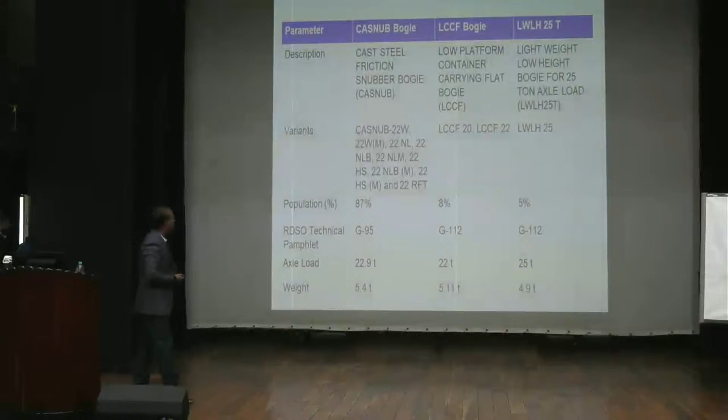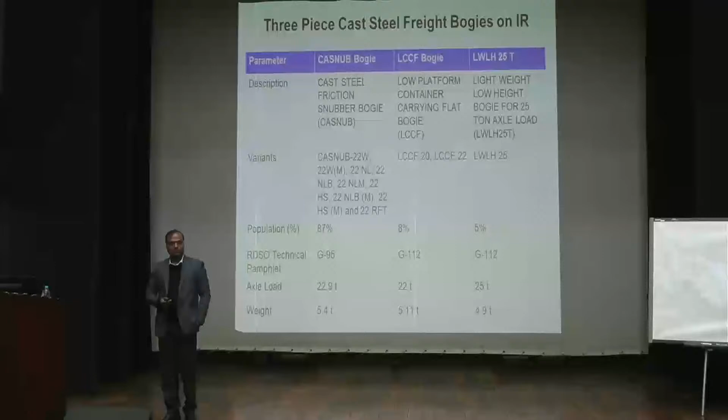Before I start, I will briefly inform you that in this presentation, I have tried to use the knowledge and the experience that we have incurred in the last two to three years with the failures that we have been asked to associate with. In this association, what we observed was that there was a feeling from our RDSO side that some knowledge was missing, not only in terms of technical guidelines, but also in making the existing guidelines understood at the field level.

In some of the cases, we observed intermixing of different bogies in a wagon, like NLB and HS bogie were mixed together. There were cases of improper maintenance of center pivot, improper maintenance of side bearer. So, not only the maintenance aspect, there was also a lack of understanding. So I tried to capture those things in my presentation.

So let's start with a brief history about the freight bogie. We can categorize the freight bogie into three categories. One is the Casnub bogie, which is one of the earliest bogies introduced on the Indian Railway system. Later on, we developed the LCCF bogie for container wagons. And the latest development is the LWLH 25-ton bogie. Each bogie has its different rules, and I will briefly touch upon that.

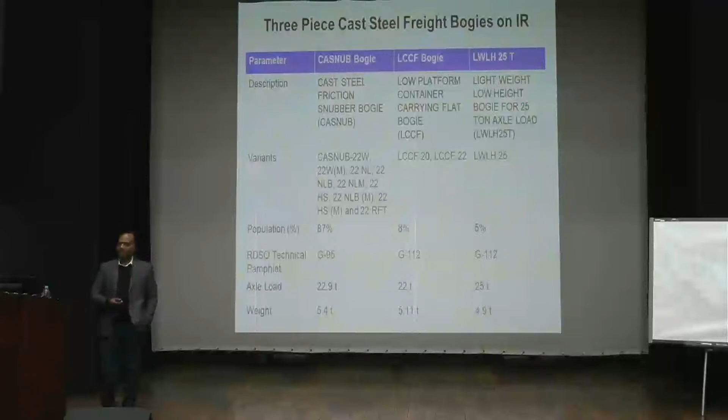CASNUB bogie was introduced, as rightly Director Sir said, in the 1980s and 70s in fact, and the earliest bogie was the W bogie, that is wide jaw bogie, and it was having wide jaw, integrated center pivot, and sliding type brake. And it was a very heavy bogie, weighing more than 5.5 tons. Each bogie weight was very heavy.

Later on, it was improved to WM bogie based on the experience. And in fact, this earliest bogie was not having any provision for elastomeric pad. So at that time there were cases of wheel wear and dynamic issues. So the concept of elastomeric pad, that is primary suspension, was introduced in WM bogie with hanging type brake beam.

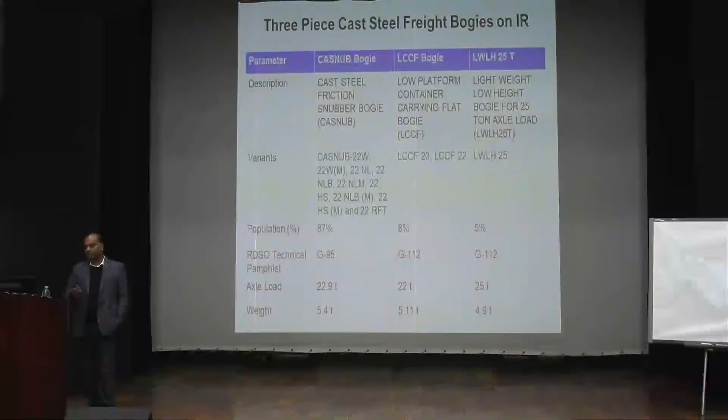Later on, a study of optimizing the bogie weight was taken by RDSO, and that led to development of the NL bogie. Now, as the name suggests, that is the narrow jaw with light weight. And again, further, the chemistry of this bogie was improved, and with the collaboration with the stakeholders, two new bogies further evolved. One bogie was called NLB, based on the same bogie; the NL bogie was converted to NLB, and that was the bogie using the chemistry of M/s Besco foundries.

And another bogie that was evolved from NL bogie was NLM, the Mukund bogie, that was using the chemistry of Mukund firm. But later on, Besco agreed to share their chemistry with Indian Railways, and we have taken forward this NLB bogie. However, NLM couldn't proliferate further because of the constraint that Mukund didn't agree to share their chemistry.

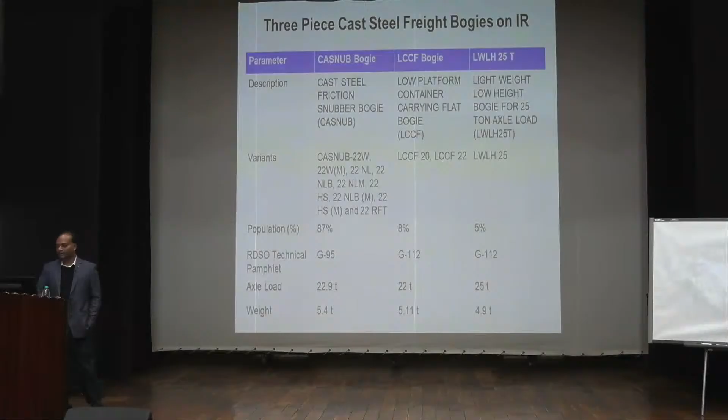Now, as you can understand, W, WM, NL, NLM, all these bogies are obsolete these days. The latest or the recent bogie is HS bogie, and here you can see some new terms HSM, NLBM, and RFT. So I will talk about these new bogies in my presentation. And just briefly I'd like to tell you that we have a technical maintenance pamphlet for CASNUB. As you know, G95 is the technical bulletin that can be followed, whereas for LCCF and LWLH, G112 technical bulletin can be followed.

As in CASNUB bogie, earlier we were using roller bearing. Later on it was upgraded to CTRB. However, in LCCF and LWLH, CTRB is being used since inception, whereas in LCCF E-class CTRB is used, and in LWLH K-class CTRB is used.

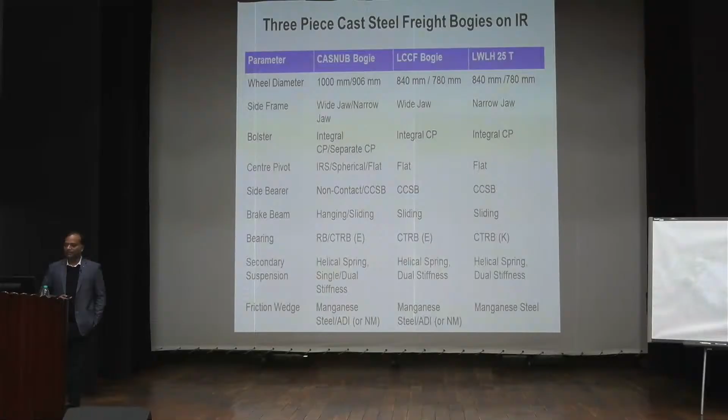Now, with respect to secondary suspension, in CASNUB bogie we are using helical spring with single type stiffness, that is for NLB, and dual stiffness for HS bogie. This is a major difference that I will also talk about in my next slides. Whereas LCCF and LWLH bogies are using dual suspension. That is, it has one suspension in empty condition and another suspension in gross condition.

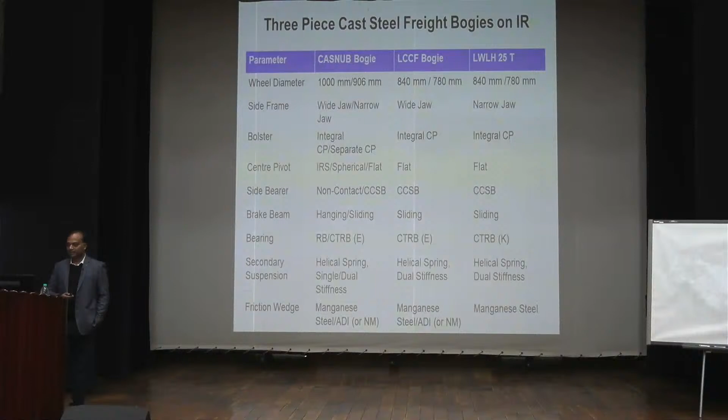The friction wedge is one of the major differences in all those bogies. In case of CASNUB bogie, we are using manganese steel in some of the bogies and ADI or non-metallic wedge in other bogies. However, in LCCF bogie, the original design, which was designed for 20 ton BLC and BLC A and B, these bogies were built with manganese steel friction wedge. Later on, when this bogie was upgraded to 22 ton, 100 kmph speed, this bogie was built with the ADI or non-metallic wedge. However, in LWLH bogie, we are using manganese steel.

Now, I'll briefly talk about these new bogies, what we have developed and which bogies are now in operation. As Director Sir has rightly mentioned, there are certain areas that RDSO or Indian Railways should work upon, and that is the axle load and the speed. And this is what we are actually working on for the last 4-5 years.

Just to mention, the global standard is that freight wagons are operational at a maximum speed of 100 or 120 km. No country is using any freight cars above 120 km. That is the maximum. So with respect to speed, we are more or less closer to the world standard. However, yes, we lag in the axle load. Now there is a concept of heavy haul operations, which means axle load above 25 tons. Ours maximum is 25 tons. So that is the area which definitely requires some study, some work, which can lead to improvement in axle load.

So as a part of Mission Raftar, as all of you may be aware, Indian Railways in 2018-19 has taken an initiative to increase the speed potential of all its freight stock to one speed, that is 100 kmph.

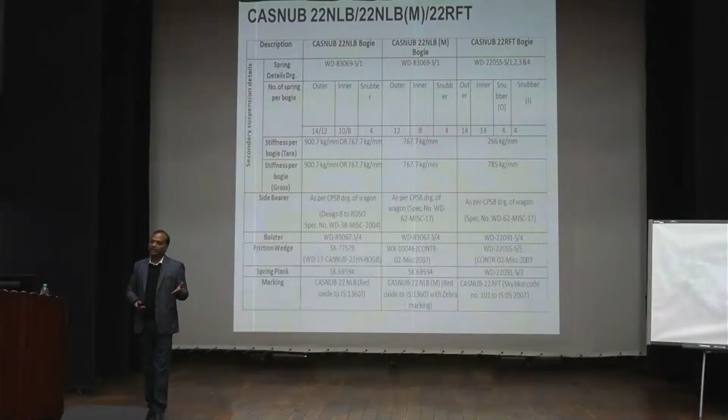So we took the initiative to modify the suspensions so as to increase the speed potential of the wagons which are not fit for 100 kmph. As part of that exercise, we were successful in upgrading the speed potential of around another 30% of wagons by suitable modification in the existing suspension. That resulted in the development of NLBM for those wagons fitted with NLB, whereas for wagons fitted with HS bogie and not fit for 100 kmph, this modification resulted in the development of the HSM bogie. I'll briefly tell what the difference is.

With respect to NLB and NLBM bogie, the bogies in totality are the same. The only difference is in the secondary suspension. It is in the number of springs: the number of outer and inner springs of NLB and NLBM were reduced. The existing NLB bogies are fitted with 14 outer springs, or in some wagons 12, whereas inner is either 10 or 8. When upgraded to NLBM, we brought the number to 12 outer springs and 8 inner springs.

Secondly, what modifications were done? The second modification was with respect to the side bearer. NLB bogies are traditionally fitted with PU type side bearer, design B. To improve the curving performance, we have used spring-loaded side bearers governed by the RDSO latest specification WD62. The third modification pertains to the friction wedge. Why was this important? To improve the damping of the bogie. The existing NLB bogies were fitted with manganese steel friction wedges, while NLBM bogies were fitted with either ADI or non-metallic friction wedges.

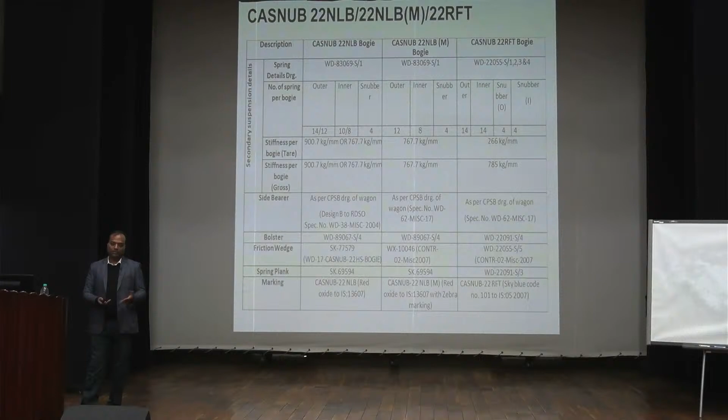What is this ADI or non-metallic friction wedge? It is basically the same wedge as the manganese steel one, but with a higher coefficient of friction. So this increases the damping of the bogie, the side bearer helps improve the curving performance of the wagon, and the reduction in springs helps improve the riding of the wagon. These three modifications help the wagon run at 100 kmph in both empty and loaded condition.

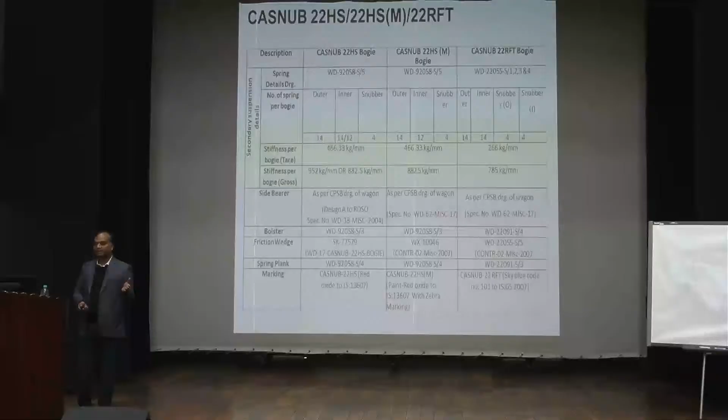Similarly, for wagons fitted with the HS bogie, we did a similar modification where the secondary suspension springs were reduced. The outer springs were kept the same, while inner springs were reduced from 14 to 12. The side bearer was changed from design A PU side bearer to long travel side bearer as per RDSO specification WD62, and the friction wedge from manganese steel to non-metallic or ADI. These three modifications helped the HS bogie wagons also improve their speed potential to 100 kmph.

However, in certain cases, even with this modification we couldn't improve the speed potential of the wagon to 100 kmph. For example, BCN type wagons, tank type wagons, or BCN HSM1 hopper type wagons, which were longer in length, wider, and higher. Their dynamic requirement is quite different, and with this minor modification we could not improve their speed potential. So that required a major change in their suspension system.

For this, we had to redesign the complete suspension system. That includes redesigning the springs, that is the outer spring, inner spring, snubber outer, snubber inner. These are completely different springs, not similar to those of the HS bogie or NLB bogie. So that is one change. This bogie was also fitted with a non-metallic friction wedge or ADI wedge. And third is the long travel side bearer. With this modification, we were able to improve the remaining wagons' speed to 100 kmph.

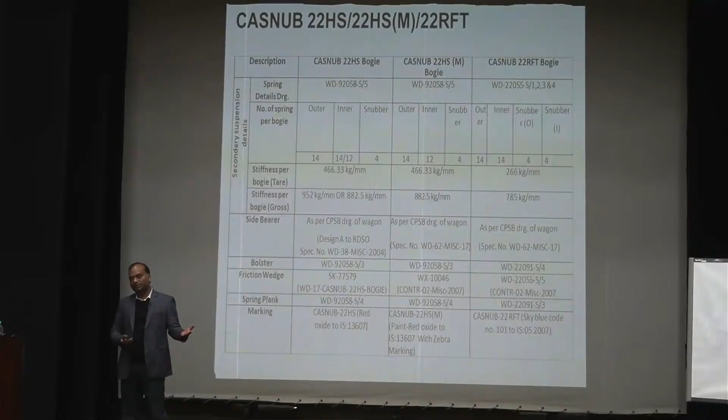And this new bogie that was developed is completely different, because it has a different suspension, a different wedge, a different side bearer, and we call it the RFT bogie. So this is another type of bogie, which basically evolved as a part of Mission Raftar.

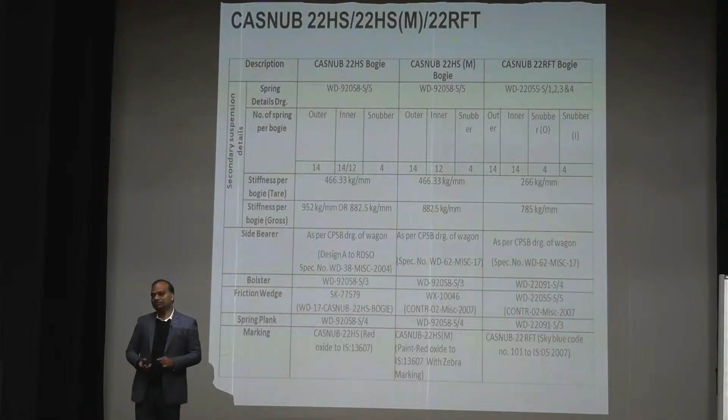One question must be coming to your mind: why do we have so many types of bogies? Most of you must be thinking that. In fact, we keep on increasing the variants. This may result in maintenance issues, confusion, and all those things. This is a very valid question. But why is it so? One reason is that you cannot have a single bogie which fits all types of wagons. Why? Because each wagon has different dynamic requirements.

Smaller wagons have one type of dynamic requirement, whereas a longer, wider wagon has a different dynamic requirement of bogies. And why different types of wagons? Because you have coal, cement, grain. These commodities require different types of wagons, and these different wagons require different types of bogies. You cannot have the same bogie fit all wagons. So this is one reason. However, while designing, we always ensure that with minimum modification we are able to upgrade the speed or maintain the dynamic requirement.

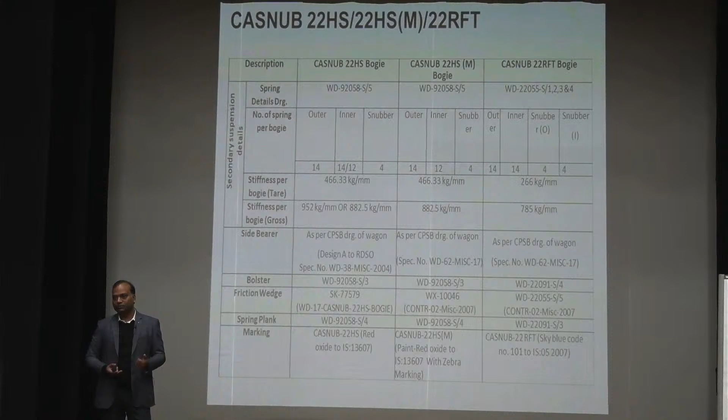And what is the dynamic requirement? That must be coming to your mind. Just to briefly tell you, any wagon or any rolling stock, before being put into service, has to meet certain safety and comfort levels. Once they are met, only then do we issue a speed certificate. That speed certificate is the authority or legal document that says yes, this wagon can be used at that speed.

And how is this speed certificate issued? Based on certain trials, which we call oscillation trials. In the oscillation trial, we run the vehicle at a speed 10% higher than the required speed. For example, if you want this wagon at 100 kmph, it has to run at 110 kmph to check its dynamic parameters. The derailment coefficient should be within the limit, lateral force within the limit, maximum acceleration within the limit, maximum lateral acceleration within the limit. All 4-5 criteria must be met so the wagon can be declared fit for operation.

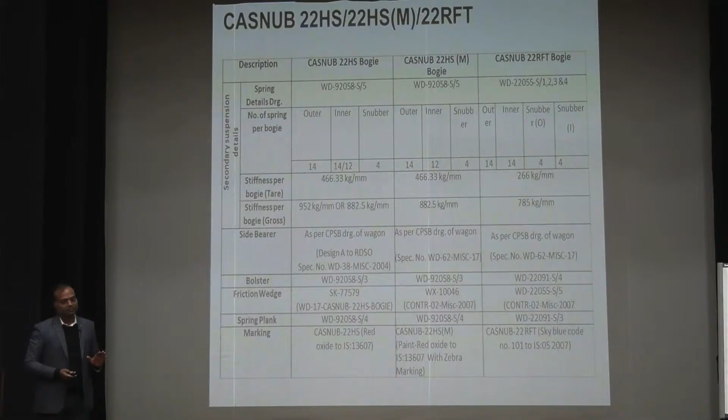So this is just a brief introduction to why different types of bogies and wagons are required, and what these new bogies are. Please understand that the NLB bogie and HS bogie are completely different bogies. Don't intermix them; this is completely prohibited. And now you may also have NLBM, NLB HSM or RFT bogies. So please keep this understanding when you are working at your workshop or depot, that clear-cut marking is given and clear-cut drawings are followed.

I have just introduced you to the wedge and side bearer, the major changes in this bogie. So keep this understanding while you maintain or receive this bogie. If an NLBM bogie is there, what type of side bearer do we have to follow? What type of wedge? What spring group do we have to see? It is given in the drawings. I am just giving you a small introduction.

Now I will come to the improvements we have made in the last 4-5 years, which we would like to share with you. This is an exploded view of a freight bogie, and as you can see, we have an axle, above which we have an adapter, and above which we have an EM pad.

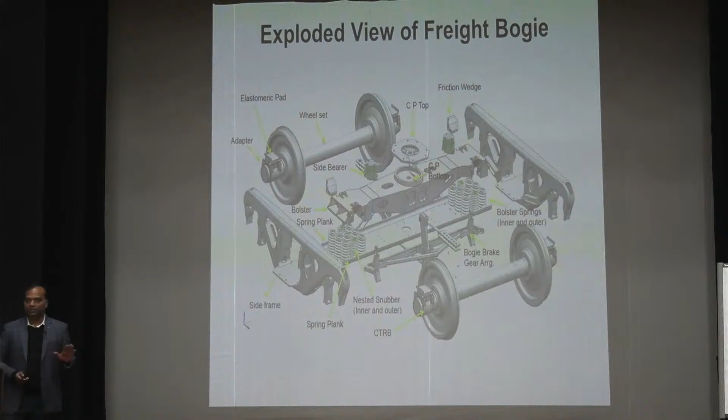I don't require much explanation on this. Okay, so you all are very much familiar with this. I'll directly come to the improvement part. So first, let me start with the jaw or the side frame level. So what improvement we have done in the last 2 years, and what you should know also.

So one thing we have done is that we have tried to reduce the clearance at the jaw level, and this is very important. We have done 3 major changes at the jaw level in the CASNUB bogie, in the LWL bogie, and we are also doing it in the wide jaw LCCF bogie. This will also be issued to all of you very soon. We will be getting an instruction. But for CASNUB and LWLS bogies, it has already been done.

And what are these modifications or changes? Number one, we have first provided lugs towards the elastomeric pad just to restrict the unwanted movement of the elastomeric pad. As you can see here, there are two lugs, and similarly one more lug is on the other side. Okay, so you have to provide these lugs during maintenance by welding a proper metal piece with MIG welding.

And now whatever new bogies are coming, they are having them as cast. So you have to just do the retrofitment, and I think most of you are familiar and have been doing this. Okay, the purpose of this is to restrict the unwanted movement of the elastomeric pad, and also to a larger extent it prevents the tilting of the adapter. Okay, so this is one of the major important things.

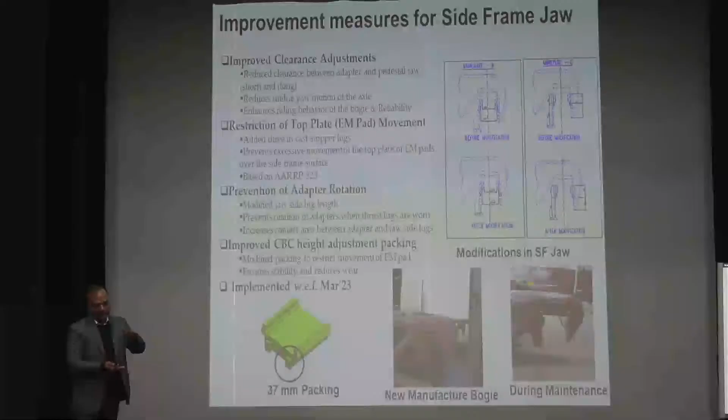Okay, and apart from this, we have increased the projection area of the long jaw. As you can see, this is the long jaw area. So this will basically increase the contact area of the side frame with the adapter. Okay, so you must be having experience of a line sort of wear visible over the adapter. A very narrow strip sort of wear is visible after, let us say, 1 year, 2 years along the adapter. This has happened because a very low contact area is there between the adapter and side frame.

So to avoid such a situation, we have basically increased the thickness. So it increases the thickness and also reduces the clearances. So this will keep the adapter always restricted and avoid any unwanted movements. And the increased projection will ensure that it has a very low wear rate rather than line wear contact.

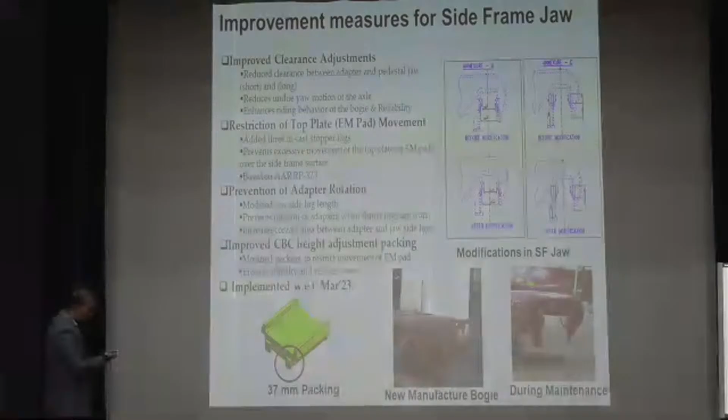Okay. Apart from that, this is the 37 mm packing which is used to maintain the CBC height. Okay, when the wheel dia goes below, I think, 950. Okay, sorry. So this is the packing used. Earlier, it used to have a very big center hole, and it was found that it was making serious projection over the side frame roof, isn't it? So we have reduced that hole and made it plain.

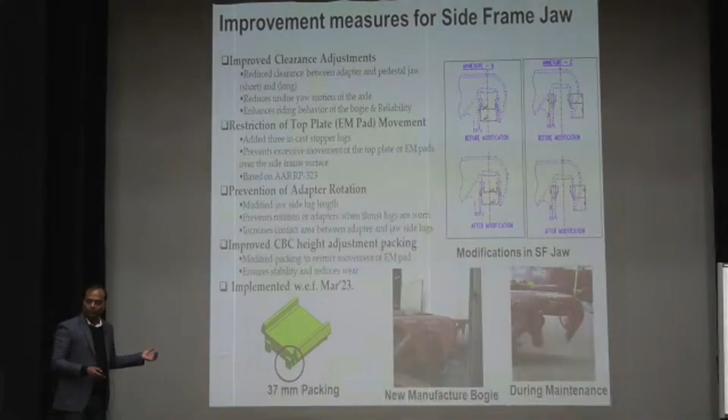Number one, we have provided this sort of lug on this packing. So what will it do? It will tightly fit with the elastomeric pad, and it will be so tight or so integral with the elastomeric pad that it will not allow any sort of movement between the elastomeric pad and the packing.

Otherwise, I have seen personally, in fact, that in most of the cases, this packing is either on the rear side of the jaw or on the trailing side of the jaw, and once it reaches that level, it will maintain that position. It will at all times lead to eccentric loading on the adapter and tilting of the adapter both. So this integral provision will ensure that it maintains the integrity with the adapter and the elastomeric pad. So these are the basic small changes.

Accordingly, all the drawings have been issued, and we are working on G95 also. Very soon you will get a very good document with regard to G95. And in fact, I would request all of you, my team is here, Mr. Pramod and Mr. Vijaypal, they will be contacting you. So you can give them your feedback with regard to G95: what are the changes you want, or what are the problems that you are facing with G95?

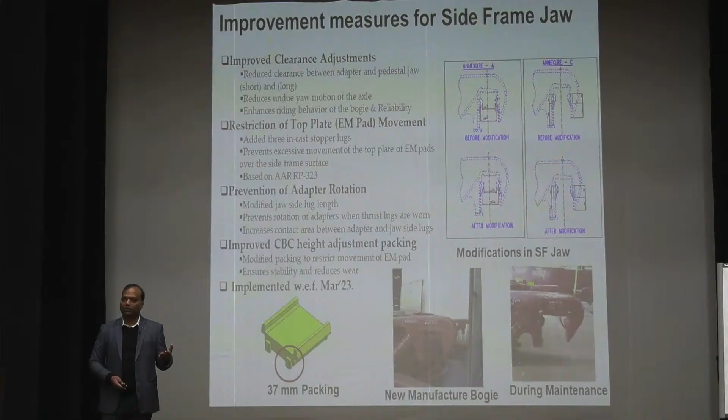Because this is a long exercise we have been doing with the modification in G95, and we are trying to ensure that the document which comes up is more practical, understandable, and eases your maintenance activities. So this is the best time for all of you to give your suggestions. Today we are here, tomorrow also we are here. If you want any one-to-one interaction, you can talk to them or me also.

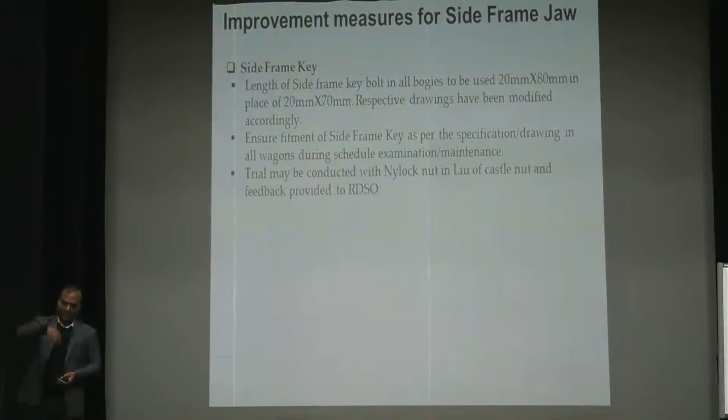Now, improvement measures for the side frame. Again, there were many references from the Zonal Railways that the SF key bolt is not properly fitting with the nut. We examined it, and what we found is that when the SF key is put on the side frame and the bolt is inserted, due to non-standard thickness of the side frame bottom, it sometimes led to difficulty in tightening or fitting of the second nut.

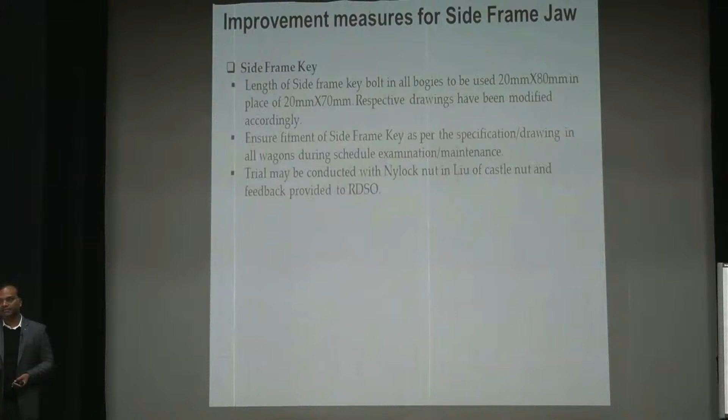So what we did, we have basically increased the length of the SF key bolt from 70 mm to 80 mm, and we have now found from most of the workshops that it is solving the issue they were facing. Secondly, we have also made one change, basically on a trial basis: a Nylock nut in lieu of a castle nut can be used. Many railways are using this. We have asked them to give their feedback. If feedback is positive, we will regularize it, standardize it, and make it a part of our G&A.

Here, people are welding it. Yes, sir. In case of the castle nut, they are welding it. But in case of the Nylock nut, that provision is not there, yet they are almost welding it. Side keys are welded. They are welding it because it is that strong. Now if you put a Nylock nut, they still weld it, and the Nylock nut loses its purpose. That is the only major issue.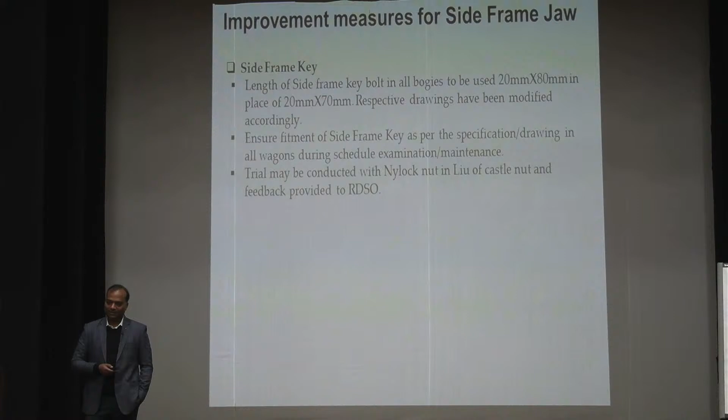So how would you address that part? From a safety point of view, the castle nut is in fact better because it has a provision for welding, and at least cutting is not done. Yeah, we will think about that. We are working on it. This is the best we have come out with. But it is not an engineering issue. It is a behavioral issue.

Yes, sir, definitely. So you are trying to address Nylock nut versus castle nut. It is not an issue which has an engineering deficit. So either you should have an uncommon design. Let us think about this, sir. Definitely, if you provide something technical, check it out. Instead of 80 mm, you go for 90 mm, maybe 2 nuts, maybe save some effort.

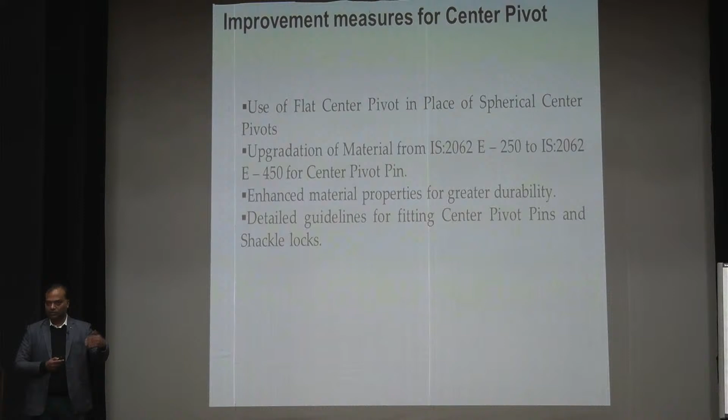Secondly, I will talk about this in more detail in the next slide - that is the upgradation in the material of center pivot pin. We have issued a detailed guideline for fitting center pivot pin and the shackle lock. I'll talk about these guidelines in my next slide. So one part we have touched upon is the improvement in center pivot pin, shackle lock, and lock pin.

These three items - center pivot pin, shackle lock, and lock pin - earlier we had defined a grade, but we hadn't defined a material in the process of manufacturing. Now we have standardized the material for all these three pins as IS 1875 class 4, which is a forged material, and the process is mandated as forging. So it cannot be manufactured now by any other means - it has to be manufactured only by the forging process using this material. So this is the one change we have done.

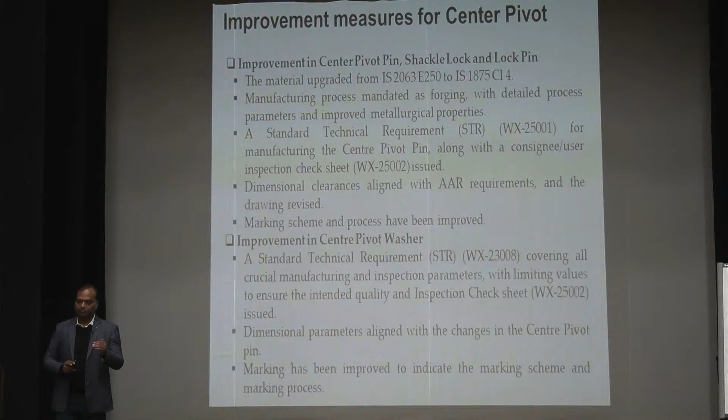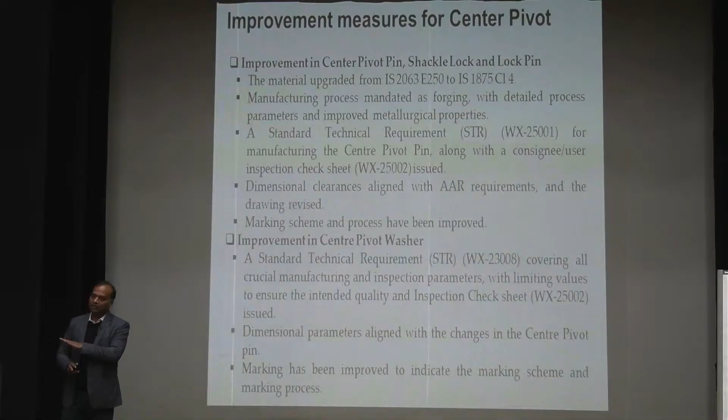Number two, we have issued a very clear and beautiful standard document covering the detailed manufacturing process, infrastructure, testing protocol, and limits in this STR, along with one check sheet, because it is not an RDSO control item, it is a consignee inspected item. So just to ease your purchase and make it more understandable what material you are getting, whether it meets the requirement of specification or not, we have issued one STR and check sheet to ensure that. Whatever I am talking about, I have covered all the documents at the end of my slides, which I will be sharing with you. You can refer to them, or probably you already have those documents.

Third is one more major issue we were told about - shearing of center pivot pin. In some derailment cases, and not only derailment cases, in some normal service conditions also, we have observed that some center pivots had a dent mark or shear. I want to tell you that the center pivot pin should not take any kind of load. All tractive effort or braking is basically transmitted from the bogie to the wagon or wagon to the bogie through center pivot top and bottom, and in all this situation the center pivot pin is basically free.

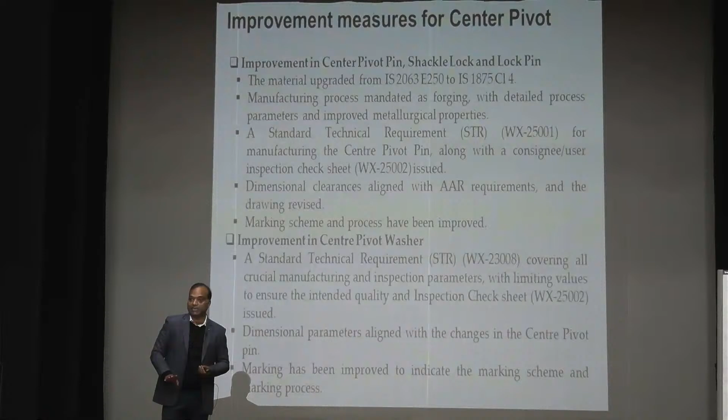But if it is free, then why is it taking shear load, or from where is this dent mark coming? So we examined this aspect, and we found that when the center pivot top and bottom is at the extreme maintenance end, where wear is maximum, in that situation there are possibilities that the center pivot pin may touch the inner hole of the center pivot bottom and top. It is not designed to take any load - it is just used whenever you lift a wagon or bogie, or when you want to dismantle, you just remove the shackle lock and the bogie and wagon become two separate units. But in case of derailment, yes, this plays a major role.

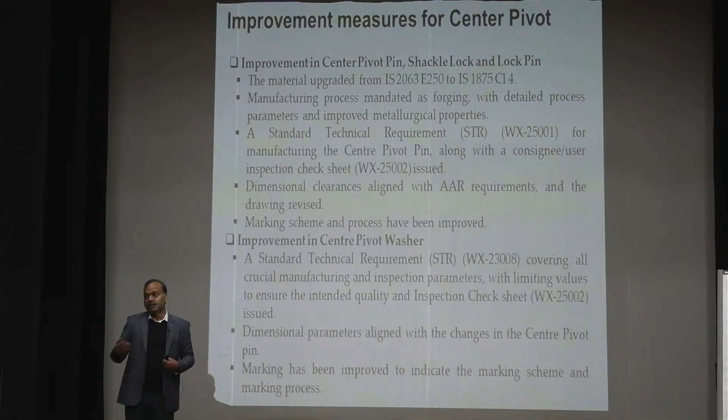In case of derailment or any severe movement, then what happens? This will basically keep the bogie integrated with the wagon body. Otherwise, the bogie and wagon will dismantle, and in some cases you might have seen that due to derailment, the bogie and wagon has spread like anything.

Earlier it used to be 55 mm. Now we have reduced it to 45 mm. With this reduced dimension, even in the worst condition, it will never touch the center, the inner hole of the center pivot bottom. So that is one aspect.

Secondly, we have upgraded the material from 250 to 450, so the mechanical properties are improved. The strength is more or less the same as what used to be with the 55 mm. Now it is the same with the 45 mm diameter.

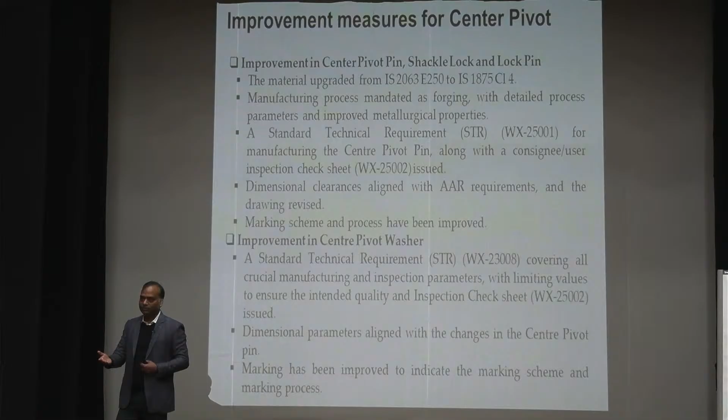So drawings have been issued. You have to just ensure that whenever you are going to change this center pivot pin, please follow those drawings. Please ensure that the new center pivots are being fitted as per this latest drawing.

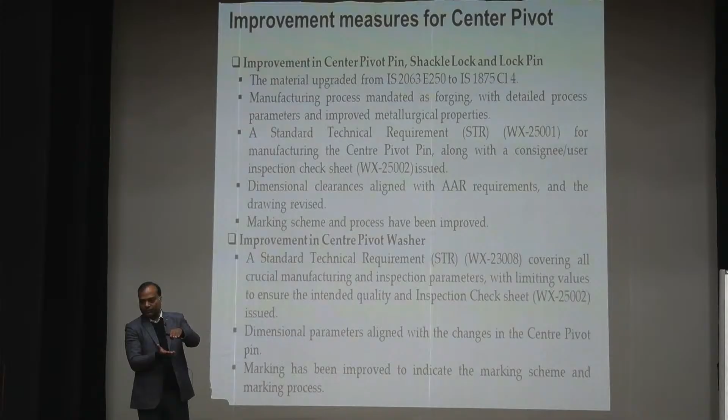You said it is not supposed to take any load. No sir, in normal operation it should not take any, because what happens, sir, is there is the bolster and body, and from there the center pivot top, and then it comes to the bottom. And at the bottom you are putting the shackle lock, washer, pin, and safety pin. Even then you have at least 10 to 15 mm gap between the bottom of the center pivot bottom and the top of the washer, since the washer is the unit which is on top.

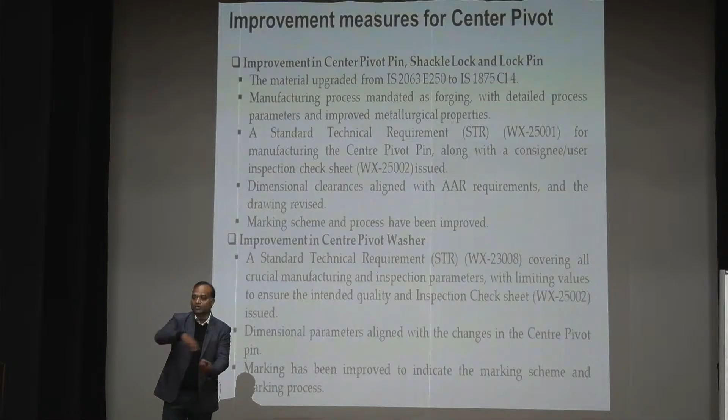So up to 10 mm of vertical movement it will take, yes. And during this tractive or braking effort, or even lateral movement, the clearance is just 5 mm between the top and bottom, so first it will get compensated, isn't it? So even then the pin should not take load. In fact, I am just mentioning this to you, sir. Yes sir, it is allowed to go up, and if the lift allowed is more than that between top and bottom, then it might go up, so that's not the case.

Sir, the lift in the side, center, top and bottom has to be more than the allowed clearance. Yes sir, that will never come out. Exactly, yes sir. If that be the case, then it will not touch. Yeah, why is it touching then? It must be touching because the clearance will be allowing it to move. Yes sir, exactly, right, and then touching it. Exactly, unless those clearances are arrested, this might happen.

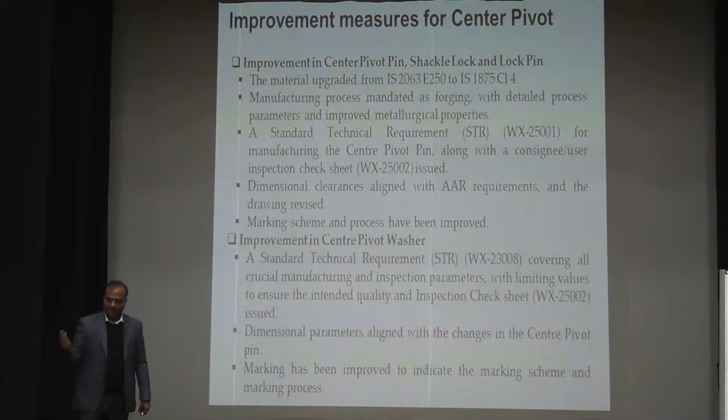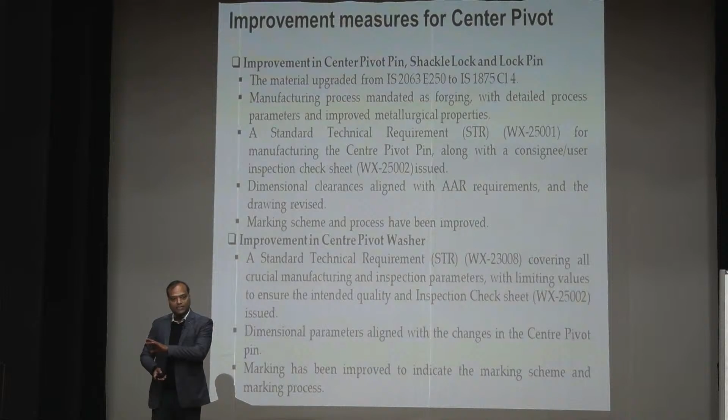Definitely sir, that also we have done. I am touching that in the next slide, I'll talk about that, sir. Yes, you are very right, sir, that is a very important aspect, what sir has mentioned, about the clearances. Earlier, just to mention, and I will talk on this issue in detail in the next slide, in case of the flat center pivot, the vertical and horizontal clearance were not specified anywhere, isn't it, it was not specified anywhere. Now we have tackled that. We have now clearly mentioned, and I will talk about how this clearance is maintained, what the upper limit is, everything. So this is a very important part.

Second is improvement in the center pivot washer. Yes, so the center pivot washer definitely plays a very important role in the dynamics and also the performance of this complete center pivot assembly. What is this? It is basically a metal and non-metal compound placed together, a rubberized part on the top and the metal part at the bottom, both bonded together. And the purpose, as sir said, is that when you lift a bogie or a wagon, in that case it should try to damp out certain shocks or certain jerks.

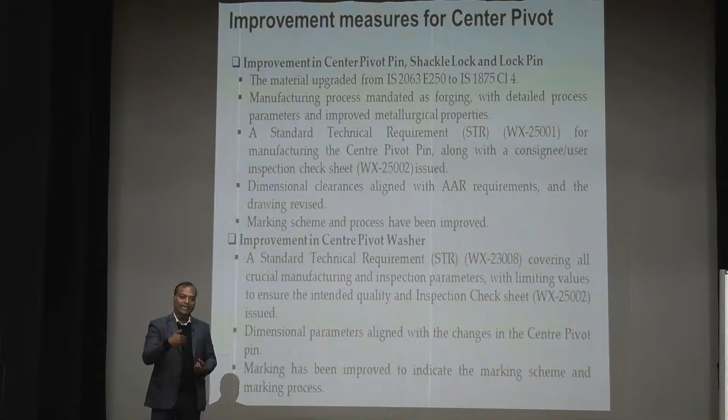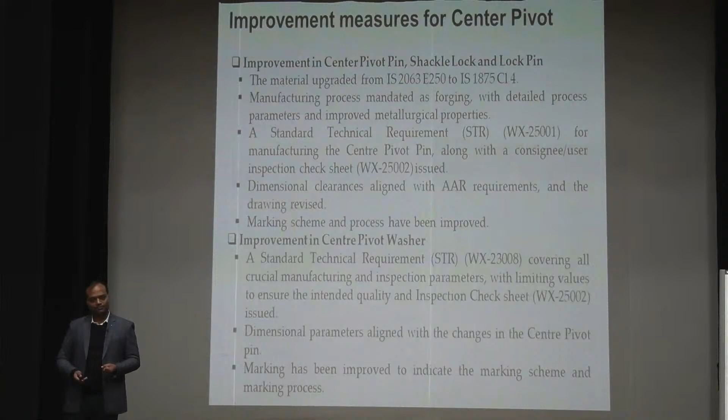For this also we have made a very standard technical requirement specification that you should follow while placing a tender, or you should communicate to your store officers or the procurement agency that whenever you are procuring, please make sure this STR or these check sheets are part of that. And not only that, since it's a consignee inspection, you can also inspect at your end. So just to ease the quality check of the material, we have made a ready-made standard with respect to STR and the check sheet.

In both cases, the center pivot and center pivot washer, one aspect which was completely missing was the marking. And not only in these two items, in fact I would like to tell you that in all the bogie items, especially those which are RDSO controlled, we have tried to ensure that not only this pin, even the shackle lock, which is a small 5 to 6 mm, 10 mm pin, is used.

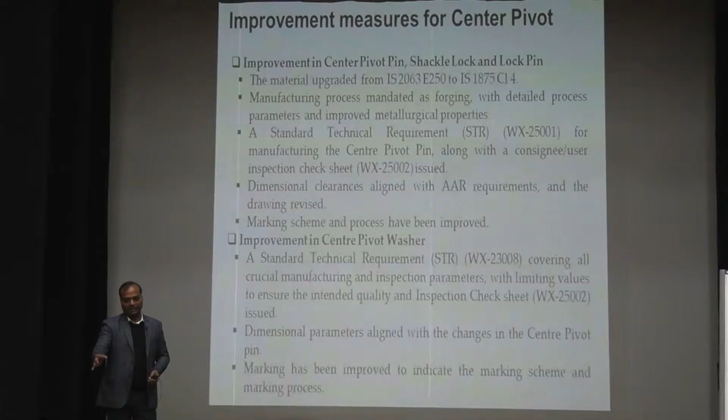There also we have clearly mentioned that the marking has to be done. Each and every item should have clear-cut marking with date and year of manufacturing, so that traceability of the material is there. This is one of the best ways to maintain quality, because if you don't insist upon this, the firm will only be responsible to make sure the item reaches your premises, and then you forget and are never able to trace back from where you received it. So make sure each and every item has a clear-cut marking scheme.

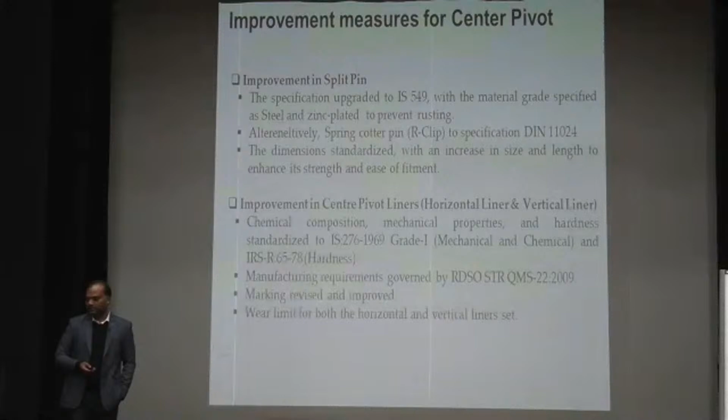We have clearly mentioned this in the drawings. Similarly, in the case of the split pin, there was a major issue raised by the railways that split pins are very difficult to insert and very prone to theft. Yes, this is one of the items. So for that we have alternatively given a provision for fitment of spring cotter.

I'll show you, it's like that, the spring cotter. So we have a clear-cut specification of this item mentioned in the drawing, and the specification is also indicated in the drawing. Follow those instructions and specifications to purchase this item. Zinc plating has now been made mandatory, so that rust and other aspects can be controlled.

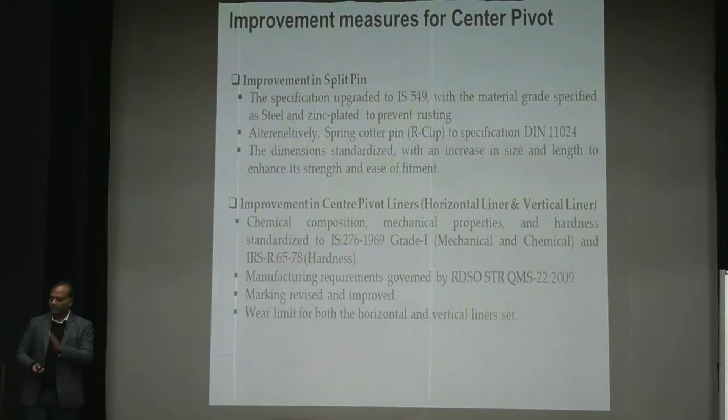Then, improvement in the center pivot liner, both horizontal and vertical liner. This material has now been clearly mentioned. Marking on these liners has been made mandatory, and the wear limit has now been defined. Now we'll talk about what those are.

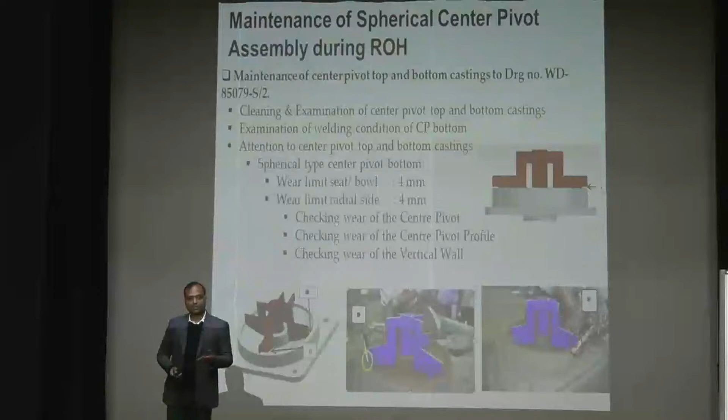Now, how to maintain the center pivot, both top and bottom, spherical type, and top and bottom flat type. For that we have issued a detailed instruction in the last two as well, and I hope some of you must have seen that. If not, we will share it with you in this workshop also. And again, all these instructions are being made part of the G95.

One confusion or concern of the railway is that you have a lot of instructions here and there, so how can one know which instruction should be followed, and when. That's a very valid question.

So to address this, we have started maintaining a practice that each instruction, each item should have one technical bulletin - either G95 for bogie, or G112 for LWLS in LCCF bogie, G115 for side bearer, and so on. So whenever any instruction is issued, it should be made part of those technical bulletins. All these instructions are under consideration or are being incorporated into this document. And once this document is finalized, you need not refer to any other document for that item.

Okay, so let us understand the maintenance covered in this document for maintaining the service. See, we are now on a digital platform. I personally feel you should correct it, you should only make one document and then issue it, instead of a multiplicity of documents - manuals, correction slips.

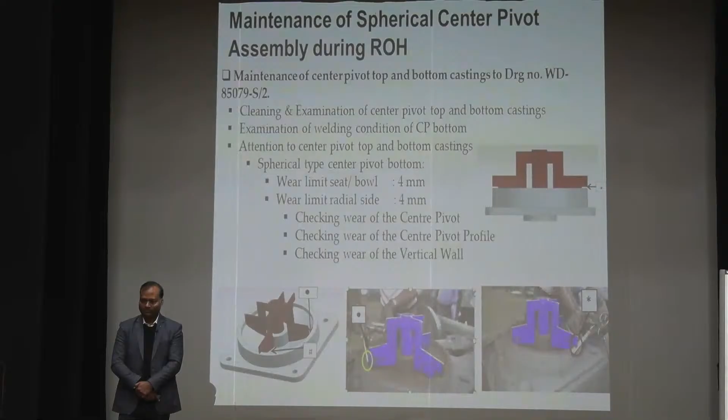Now it should be there. It's very difficult to connect. So now everybody is downloading it from the websites. Why should you take one document? You make a manual, then in the manual you refer to 20 more documents. Then you revise those documents. So it takes a lot of energy for the users to connect your several instructions, and there's no one unified instruction available to them.

Even if it becomes permanent. Yes, yes, true, sir. I completely agree with you, sir. And in fact, just to assure you, we are working in a similar direction to what you have said, that each item should have one document and it should incorporate each and every instruction issued. And you open that. Yes, exactly.

Only thing, suppose today is the 15th, I have downloaded it on the 15th and read it. If I download it on the 18th, I again download it or see it from your website, then only I follow. In this situation, the user needs to connect. I was reading this morning, 18 months ROH periodicity. A little later I realized there's a correction slip to the manual, which says again 12 months.

It is very difficult. So you continue to modify your base document and that document is dated. So it is not frozen in time that once you download it, maybe 15 months back, it won't change. If you want to follow it today, you go to the website, download it, refer to it and then do it. Yes, sir. That should be right today.

In fact, just to add to what sir said, we are doing exactly on a similar line, that each item should have a unique technical bulletin and it should constitute each and every instruction issued for that item. Not only that, you should have a correction slip whenever you are doing any modification or additions to that item. And also we are putting all these documents on the RDSO website. So that has also started.

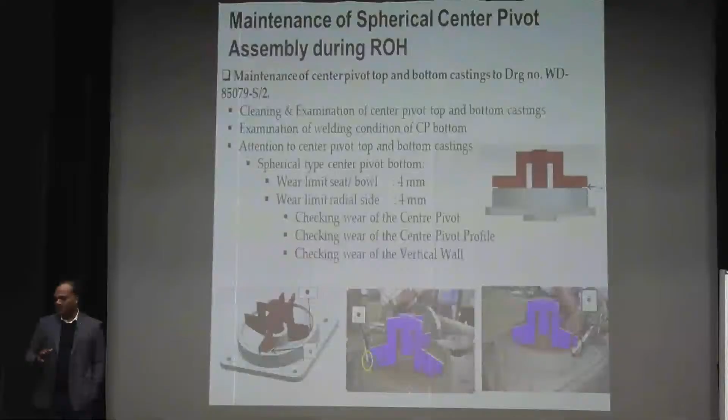For example, if you get a wagon fitted with a spherical center pivot, you must understand what the wagon is and which type of center pivot is fitted. You should understand which drawing is to be referred to, number one. Then of course you should clean, and after thorough cleaning, if you have any susceptible area, like you feel it is giving a symptom of a crack or some irregularities, then for confirmation you can carry out a DPT or MPI.

Once it is completed, these center pivots, both top and bottom, in fact the bottoms are welded around the periphery, so you may check the condition of those welds. And this is all our visual examination, which is to be done during ROH. Once it is completed, then you have to check the wear limit.

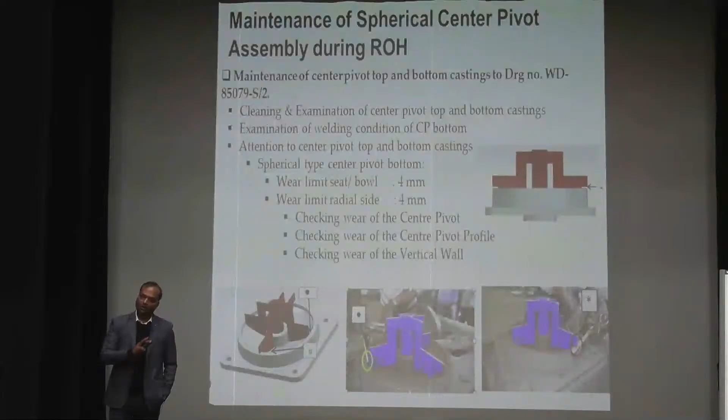I am just informing you that for the center pivot, we have made all the gauges. In fact, for all types of center pivot, all the gauges have now been frozen and finalized, and they are part of this document. You can directly refer to those gauges and follow them. It is not just mentioned, it has been enclosed in that document. So that is one of the big exercises we have done.

We have around 4-5 types of center pivots, and top and bottom taken together, it will be 8 types, I mean 6 types, and for each you have one gauge. Understand?

So now, what are the measurements you have to take for a spherical type center pivot bottom? The vertical wear limit of the bowl is 4 mm and the wear limit in the radial direction is 4 mm. Earlier, what we have informed you to be done is that, in case of spherical center pivot, you have to measure this vertical wear, correct? And another is this horizontal wear. That you all are doing, isn't it?

And for that we have a standard gauge. So now we have introduced one more profile, that is the profile gauge measurement. It is very important, and that has come up from some case studies or failure studies that we have investigated. In most of the cases, the horizontal wear limit is within the limit. Vertical wear limit is also within the limit, but along the profile there are a lot of dents,

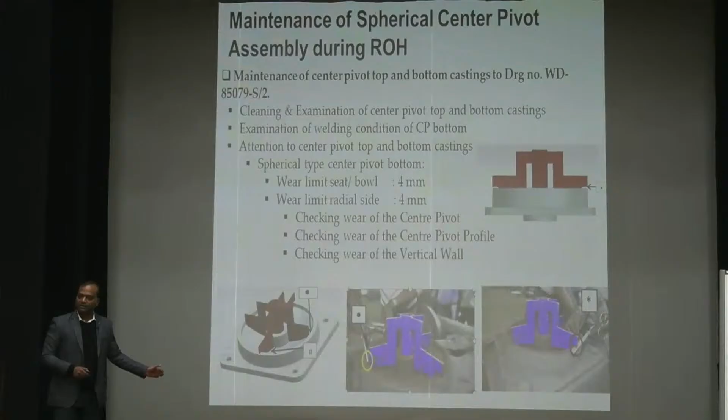and that is not being measured. It is not because you are not measuring, it is not being instructed to be done, it was not made a part of that document. It may result into improper mating of top and bottom, and that may result into improper functioning of the center pivot top and bottom assembly. So this is one aspect that we have introduced, and for all the wear limit is 4 mm. How it is to be done, with what gauges, it is mentioned in the document.

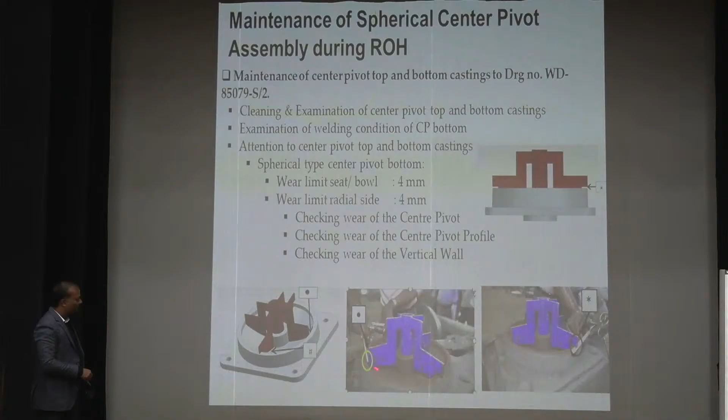Now, these are the wear limits we have, and what are the gauges we have finalized? We have actually checked them through a workshop or some clear-cut demonstration that yes, it is working. For horizontal wear, you have to insert a 7 mm shim, because 3 mm clearance is already there during manufacturing, and 4 mm wear, so a total 7 mm shim should not pass. If the 7 mm shim is passing, it has crossed the limit. Similarly here, a 4 mm shim should not pass, and in the profile also a 4 mm shim should not pass.

Earlier there used to be an instruction that once these center pivots exceed the limit, you can undertake repair. That is now completely prohibited. Please don't do any repair, because that is leading to issues with the functioning of this type of center pivot. Whenever they cross the limit, you condemn it. You have the authority of RDSO saying it has crossed the limit, just discard it. Don't go for any maintenance like filling the dent area by weld repair. Don't do this.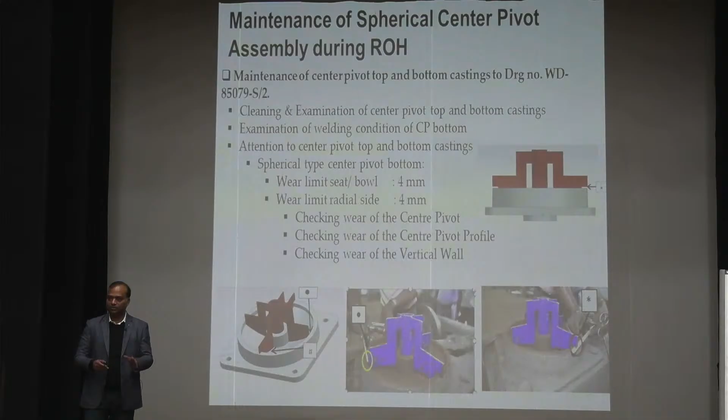Again, for the top center pivot, there was no gauge earlier. We have recommended one gauge like this. This can be used to measure the wear limit of the center pivot top in position on the wagon. You need not remove it from the wagon body. For this also the limit is 4 mm and profiles are to be checked, one horizontal and another vertical, this profile and this. A 4 mm shim should not pass.

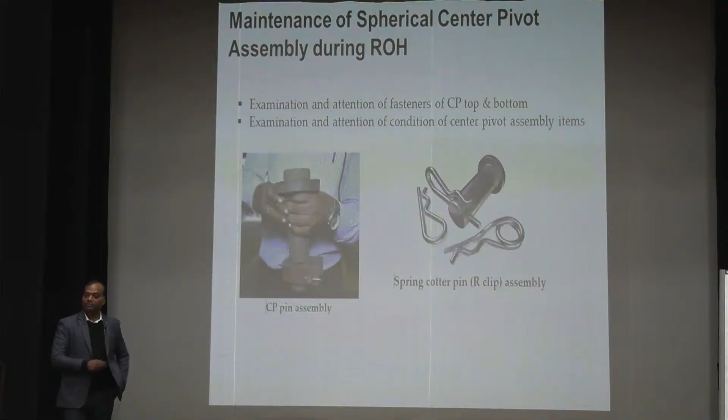Once it passes this test with your gauge, you can go for examination and attention of the fasteners fitted in the center pivot for fastening the center pivot top and bottom. Just check visually, you need not do any test. If it is okay, then examine the condition of the center pivot assembly: shackle lock, lock pin, washer, safety lock. Check that everything is in good condition, there is no dent mark, the lock pin is okay, just on a condition basis.

But again, whenever you have this item, just check whether it conforms to our latest specification or not. If not, and you cannot change it immediately, place the demand for that item and get it replaced at the next stage. Why? Because it is quite possible these items are not manufactured with forged material, or have improper dimensions or no clear-cut marking. So see those things during maintenance.

Then, before you lower, now everything is checked and maintained. Before you lower the body on the bogie, you have to maintain all these things. And one important thing is the lubrication of the spherical center pivot bottom. So while doing the lubrication, you can use either graphite powder or molybdenum disulfide base.

Both are recommended. However, in this document we have mentioned that molybdenum disulfide base is recommended over graphite powder for two reasons. In one or two cases we have observed that the graphite powder is provided, but it is not uniformly spread over the center pivot bowl. It is spread, and after some time, maybe 1 or 2 hours later, you lower the body, and during the movement, what happens?

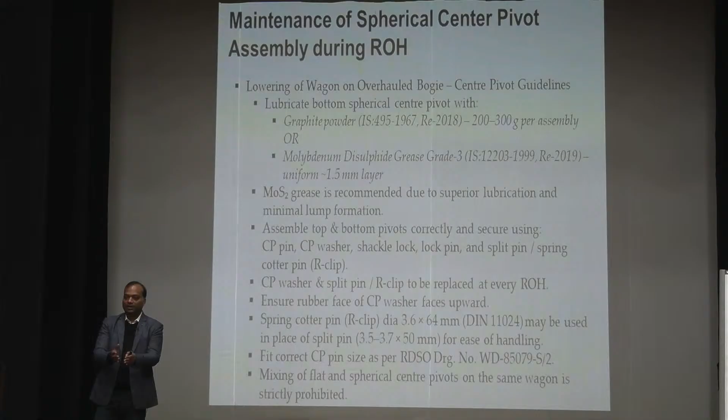It will have a tendency to accumulate at the bottom, and this is very dangerous. I'm telling you, this is very dangerous. If it accumulates at the bottom, it will result in lifting of the center pivot top from the bottom by the packing formed by the graphite powder. So ensure that this accumulation is not there before you lower. One way of cross-checking is to measure the distance between center pivot top and bottom. That is 120. That you have to do mandatorily. If you check it, you will find some deviation.

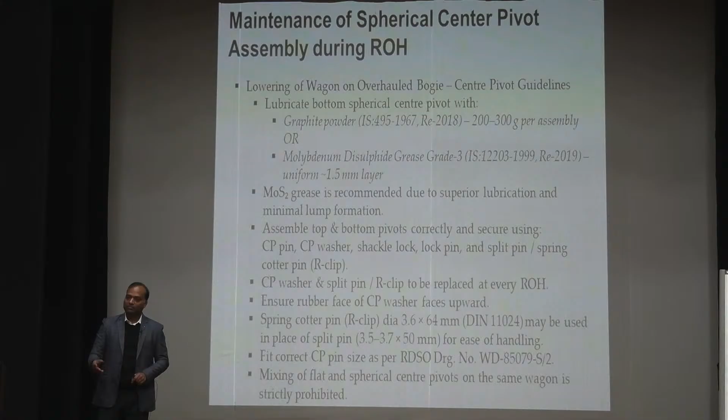So to avoid that, you either use molybdenum disulfide or ensure that it is very fine. Sometimes the railway doesn't provide this, and in some trials it was found that the center pivot had some issue because of non-availability of graphite powder. Then the railway becomes overactive and starts doing more than what is required. This is not required. Over- and under-application is not recommended. So make sure that you use it properly, and you can get this graphite powder cross-checked.

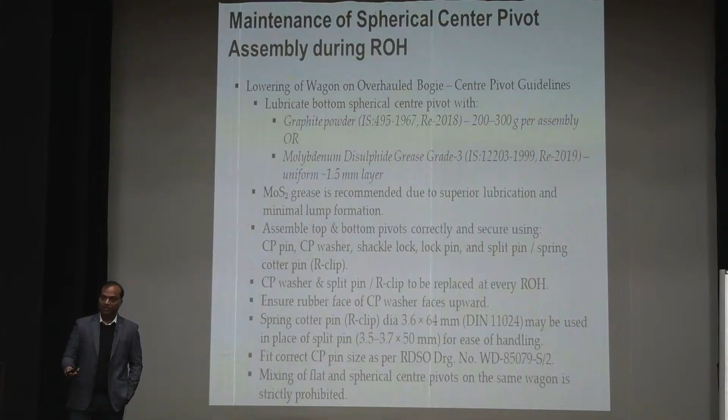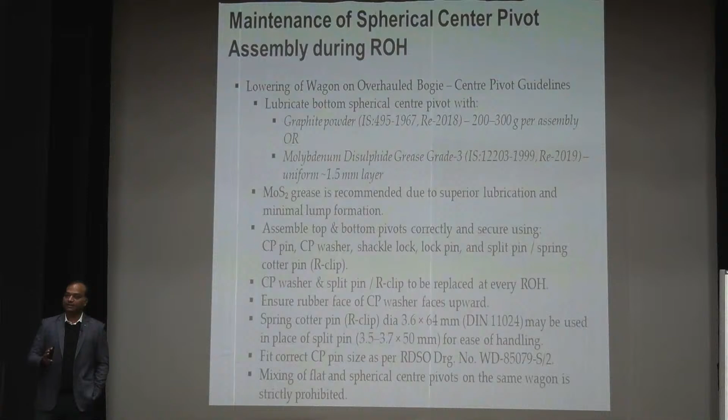Once it is done, you have to check the correct securing arrangement: CP pin top and bottom, CP pin washer, shackle lock, lock pin, etc. One thing we have recommended is that the CP washer and split pin are mandatorily replaced during ROH. So no confusion. You can plan accordingly and ensure the washer is replaced whenever it comes for ROH. While fitting the washer, make sure the rubber part is facing upward. And mixing of flat and spherical center pivots is not permitted. So this is all about maintenance of the spherical type center pivot.

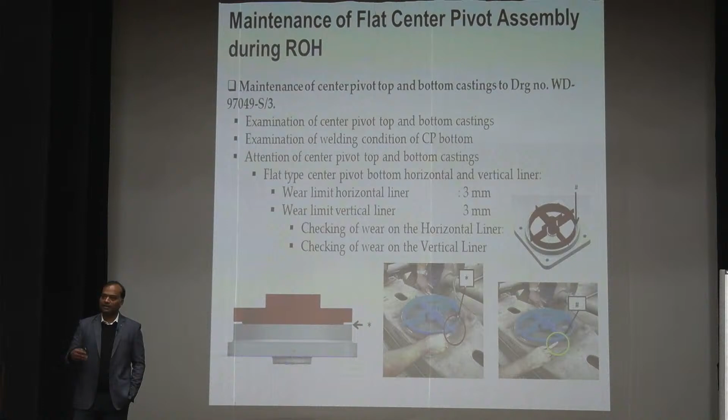Now I'll briefly talk about maintenance of the flat center pivot assembly. On similar lines, you have to examine the center pivot top and bottom castings and the welding conditions, and for measurement of wear limit, here it is quite different. Since these flat center pivots are provided with liners, whenever wear crosses the limit, you just remove the liner and replace it with a new liner. The wear limit for the horizontal liner is 3 mm and for the vertical liner is again 3 mm.

And on similar lines to what we recommended for the spherical type, this is the horizontal wear limit of the liner, and the vertical is here. You can check it here. In case any wear crosses the limits, you have to cut the welding, remove the worn liner, and put in a new liner.

And on similar lines, the spherical center pivot is not provided with any liner. Since it is hardened, the wear limit is very low, that is 4 mm. So check whether these wears are within the limit or not, horizontal wear and vertical wear. We have clearly provided which gauges to use and how, so you can refer to those gauges.

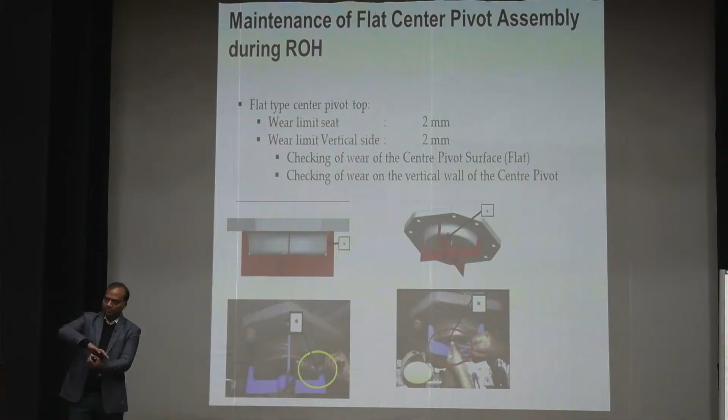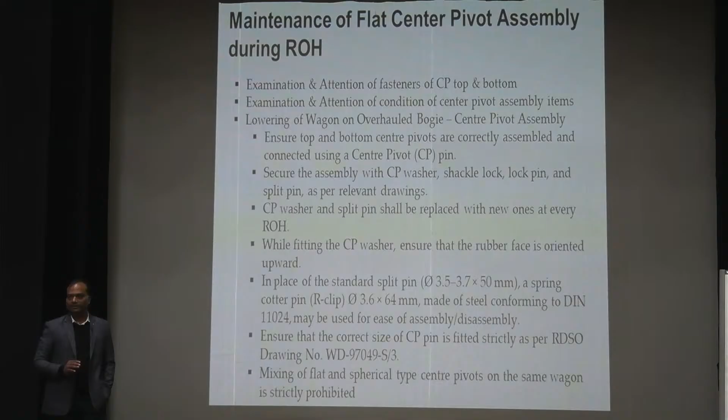Now this is again in a similar line. You can follow here. Don't require to provide any sort of grease or graphite powder. Not required because liner itself has a lubrication property. So this flat type center pivot doesn't require any greasing or lubrication. You can do directly. And in a similar line, you have to do the assembly checking before you lower the things.

Here is just a glance for you, and it is given in the document also, and we will put it into this G95. Then here you can see what is the drawing number. These are the various types of center pivot drawings.